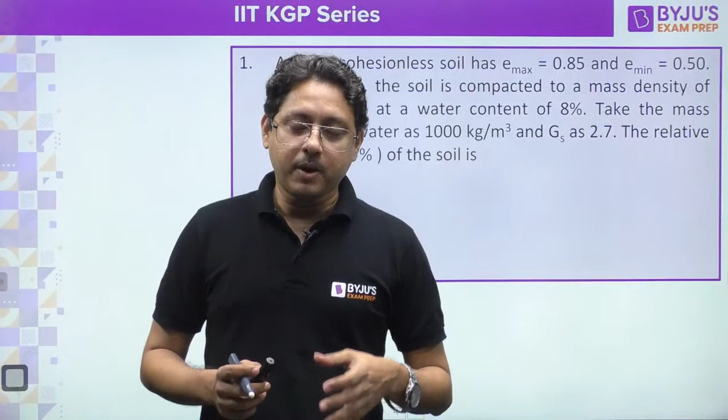So here is the first question for all of you. Before starting the question, I would like to discuss what kind of soil mechanics questions they have asked. As I told you, for strength of materials, one cannot predict exactly, but if you go through the previously asked questions, deflection was the most favorite chapter for IIT Kharagpur. Now here it is not like that. Almost from each and every chapter they have asked.

If you go through each chapter of soil mechanics, they have asked from each and every chapter. They have never skipped any chapter. So complete soil mechanics is important for IIT Kharagpur. So here is the first question.

A given cohesionless soil has Emax and Emin given. In the field, the soil is compacted to a mass density of 1800 kg per meter cube at a water content of 8%. Take the mass density of water as 1000 kg per meter cube, and Gs is also given. He is asking the relative density. You know the formula for relative density, that is nothing but Emax minus E divided by Emax minus Emin. Emax and Emin have been given, only the void ratio we are supposed to calculate.

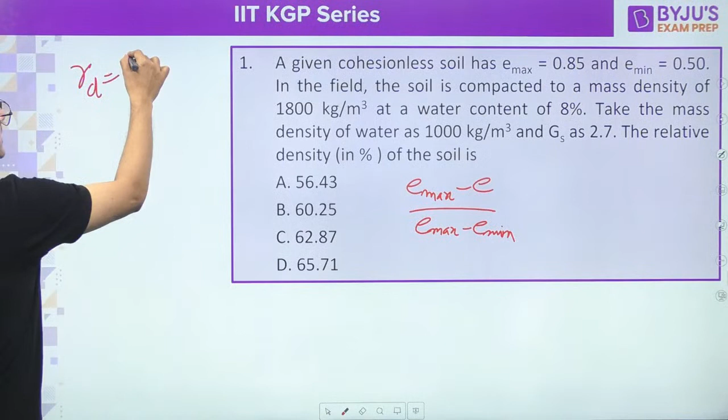For the void ratio, they have given the mass density at a water content of 8%. From that mass density you can calculate the dry density: 1800 divided by 1 plus the water content, which is 0.08. If you calculate, you will get around 1666.67 kg per meter cube. That is the dry density. Once you get the dry density, you know how to calculate the void ratio.

The void ratio can be calculated using the formula gamma D equals G plus eS by 1 plus e, and when S becomes 0, simply G by 1 plus e into gamma W. So 1666.67 equals G, given as 2.7, divided by 1 plus e, into 1000 kg per meter cube for water. If you calculate from here, the void ratio you get is around 0.62.

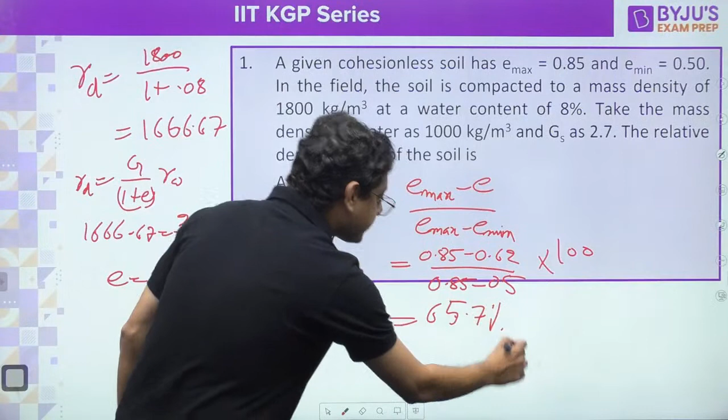These are just normal questions from the first chapter, and the first chapter is basically useful wherever you go, in any of the examinations. This first chapter of soil mechanics is quite handy and useful, right?

Forward to the next question, that is, a certain soil has the following properties given. He is asking the degree of saturation of the soil. How will you calculate the degree of saturation? It is quite simple, isn't it? Se = wG. But for this, e is not known to us. So you can calculate e from the porosity they have given. Porosity is 40%, that is 0.4, so e = 0.4 / (1 - 0.4), which is 0.4 / 0.6. You can keep it as it is if you want to do the calculation further.

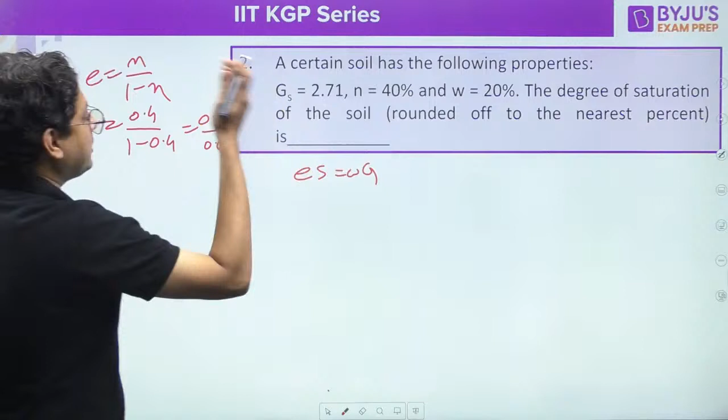So he's asking about the degree of saturation. S will be nothing but the water content given, that is 0.2, 20% water content, and the G value they have also given, which is 2.71, isn't it? 0.2 into 2.71 divided by 0.4 by 0.6. If you calculate, please let me know how much you are getting. What is the value you are going to get? The value you are going to get is almost around 81.3%.

81.3%. As they have asked, rounded off to the nearest percentage, means they are not willing to take any decimal, right? So rounded off will be 81%, isn't it? Rounded off will be 81%. Did you get that?

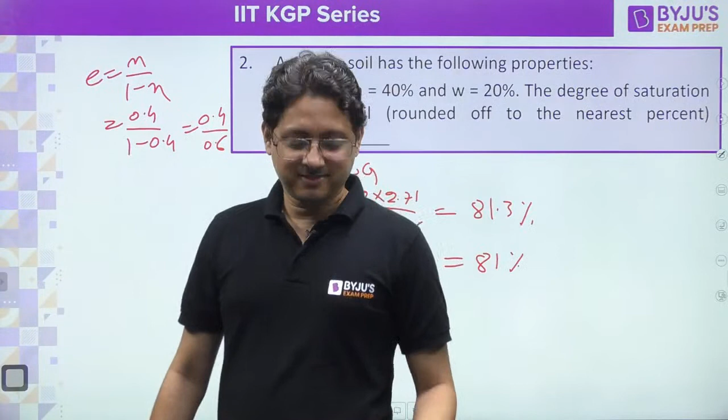Okay, go to the next question. Yes, Rahul, you did the calculation. I can tell you, you are getting 80.89. You know why? I'll tell you. 0.4 by 0.6, if you calculate it here and write down the value like 0.667 or something like that, then you are going to get 80.89. If you keep it as it is, the way I kept it, you'll get 81.3.

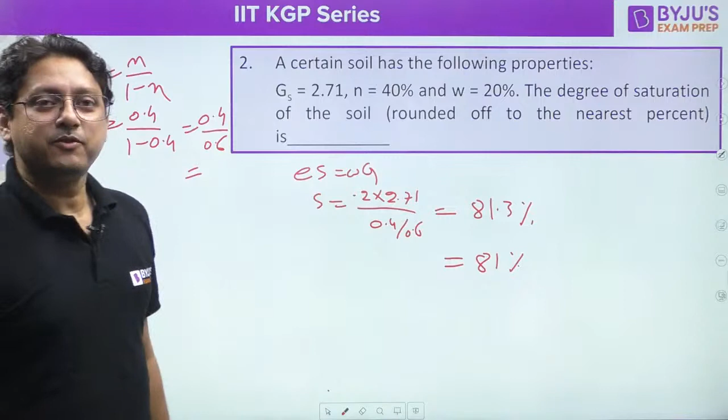The next question is, a soil sample has a void ratio of 0.5 and its porosity will be close to. That is too easy, isn't it? Just now we have solved it. The void ratio is given, and he's asking about the porosity, that is e / (1 + e). That's all. 0.5 by 1.5 will become simply 33.33, and that's 33%.

Next one. A borrow pit soil has a dry density of 17 kilonewton per meter cube. How many cubic meters of this soil will be required to construct an embankment of 100 meter cube volume with a dry density of 16 kilonewton per meter cube? So based on the dry density, he's asking what volume you need to take out from the borrow pit, isn't it? That is, 100 meter cube of embankment volume you need to fill.

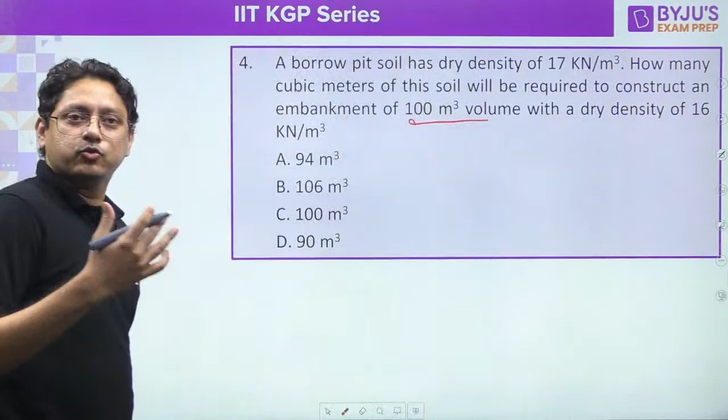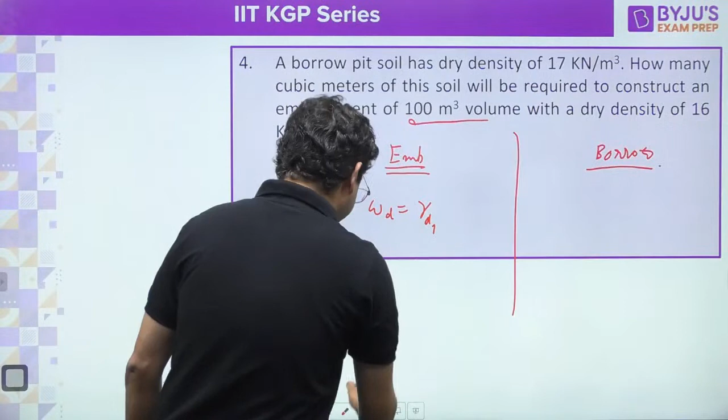So you must know one thing, that the dry weight of the soil will remain the same, right? If the dry weight remains the same, you can write it down for the embankment and for the soil you are going to take from the borrow pit. For the embankment, the dry weight of the soil is nothing but unit weight into volume. So that is the dry unit weight gamma d1 and volume V1, and here also the weight of the dry soil will be gamma d2 and volume V2, right?

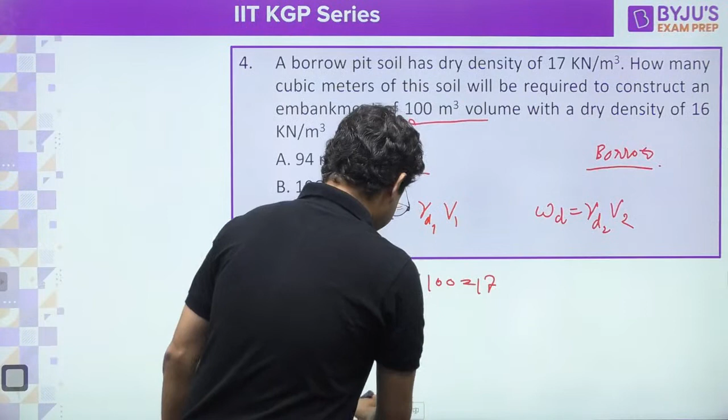For the embankment, both gamma d and volume have been given. The gamma d for the embankment is given as 16. So if you equate both weights, you'll get 16 into the volume 100 must be equal to gamma d2 for the borrow pit, given as 17, into V2. This volume we don't know. That is what they're asking.

Hello Swamijit, after a long time, huh?

So volume 2, if you calculate from here, how much are you going to get? It's almost around 94 meter cube, I think. 94.12 you will get. That is around 94.12 meter cube.

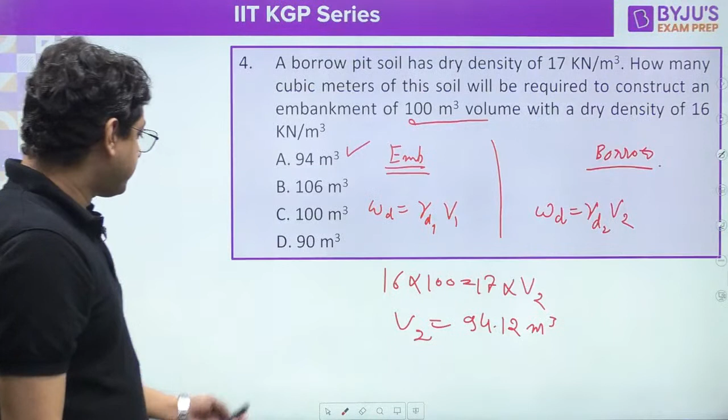Now, next one. As per the Indian Standard Soil Classification System, an expression for the A line. This is too easy. You know, they are not going to ask any other type, right? This is too easy. Almost everyone knows that.

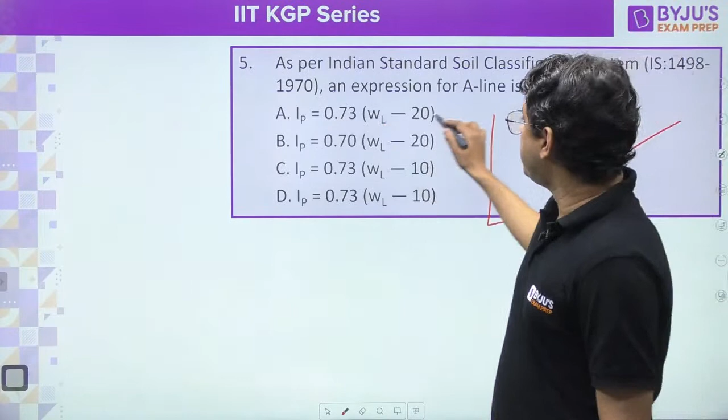A line, almost everyone knows that. 0.73 WL minus 20, that's all, isn't it?

Laboratory sieve analysis was carried out on a soil sample using a complete set of standard IS sieves. Out of 500 grams of soil used in the test, 200 grams was retained on IS 600 micron sieve, 250 grams was retained on IS 500 micron sieve, and the remaining 50 grams was retained on IS 425 micron sieve. We need to find the coefficient of uniformity.

What is the formula for coefficient of uniformity? I hope you know that. Coefficient of uniformity is D60 by D10 - the size of the sieve by which 60% of the soil is finer, and D10 is the size by which 10% is finer.

It's not U line, it's A line. Where is U line? I told you A line, I think. Santu, that was A line.

So here D60 by D10 you need to calculate. First of all, 500 grams of soil has been taken. The sieve sizes are 600 micron, 500 micron, and 425 micron.

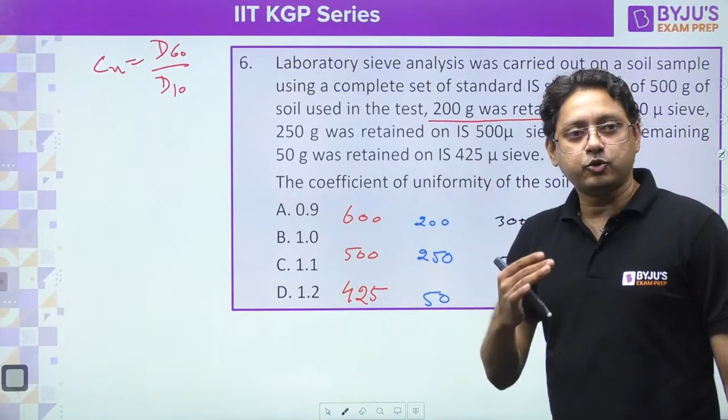So let's calculate the percentage passing from these sieve sizes. 300 is passing out of 500 grams of soil. So percentage passing, or percentage finer than 600 micron size, equals 300 divided by 500.

300 by 500 multiplied by 100 - what percentage do you get? You'll get 60%. And for this one, 50 by 500 into 100, you'll get 10%.

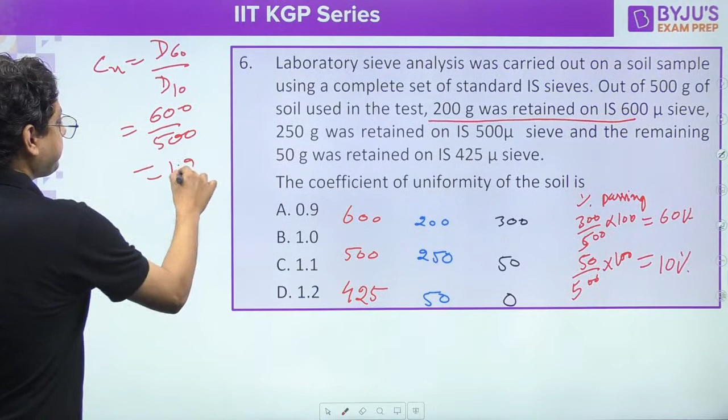Fortunately, for D60 and D10 we already have 60% and 10% directly - the size by which 60% is finer and the size by which 10% is finer. So D60 will be 600 and D10 will be 500. Coefficient of uniformity becomes simply 600 by 500, that is 1.2.

Next one: laboratory sieve analysis was carried out on a soil sample using a complete set of standard sieves. Same question here, but now he's asking about the classification of the soil.

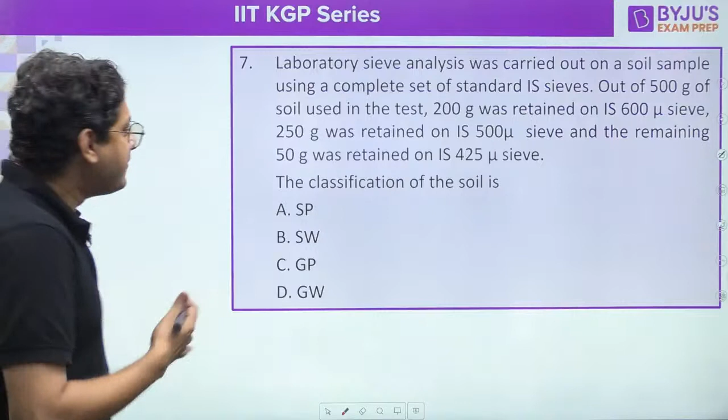Now let's see carefully, do we have any fine grains? From 75 micron, no soil is passing through the 75 micron sieve. All 500 grams of soil has been retained above 425 micron. Not even a single particle is passing from that 425 micron as per the question. So we don't have any fines.

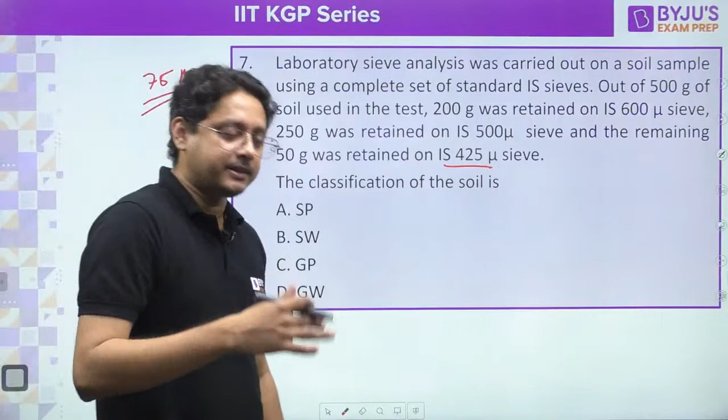Now for classification - we have to determine whether it's gravel or sand, and also whether it's well graded or poorly graded. But first it's sure that it's either gravel or sand, so we'll decide that first.

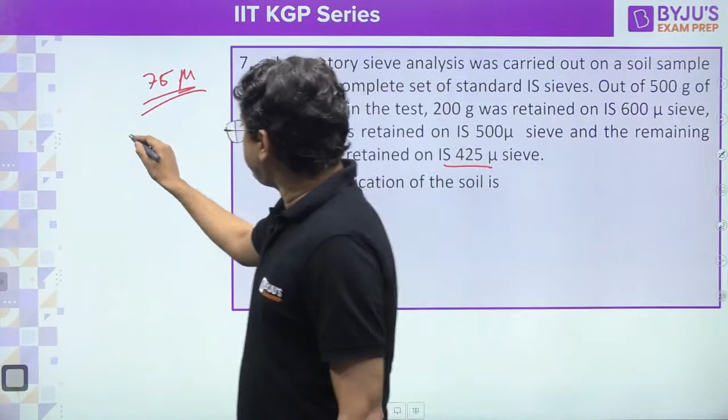If you see carefully, all the soil gets retained between 600 micron to 425 micron. And sand ranges from 4.75 mm to 75 micron. It means it has a huge range, and all the soil is actually falling in the sand category.

All the soil is falling in the sand position, so of course it is a sand. Although if it is more than 50%, we are going to give the name for the sand only. But it is all the soil coming to the sand category only, no gravel we have. So because all the soil we have is in between 4.75 and 75 micron, or 75 micron, if you write in terms of mm, it will be 0.075 mm, right? So it is a sand.

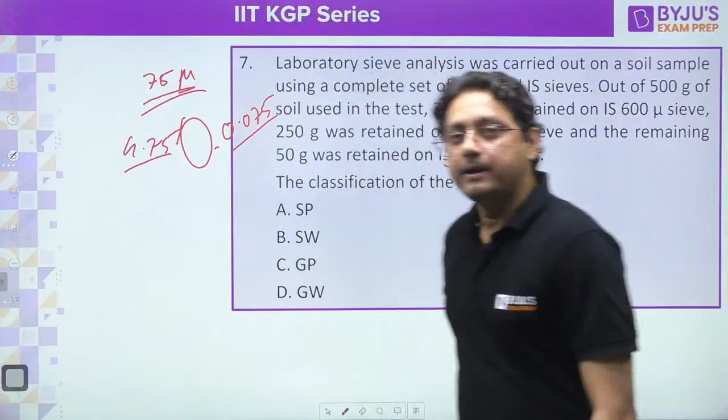Now we have to decide whether it's a well graded or a poorly graded kind of thing. If you'll see the coefficient of uniformity we already calculated, and as long as the coefficient of uniformity for the sand is less than 6, it is your poorly graded sand. Of course it is less than 6, that is 1.2 only, isn't it?

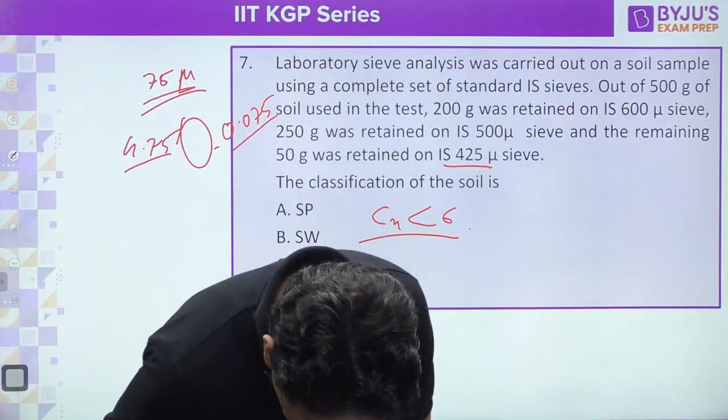Yes, Monica, absolutely correct. Babu, you are also correct. Yes, 1, 2, 3, CU ranges for well graded. So now you can say, what is that? It is a sand, although and poorly graded sand, that's all, SP. So that is the kind of categorization here.

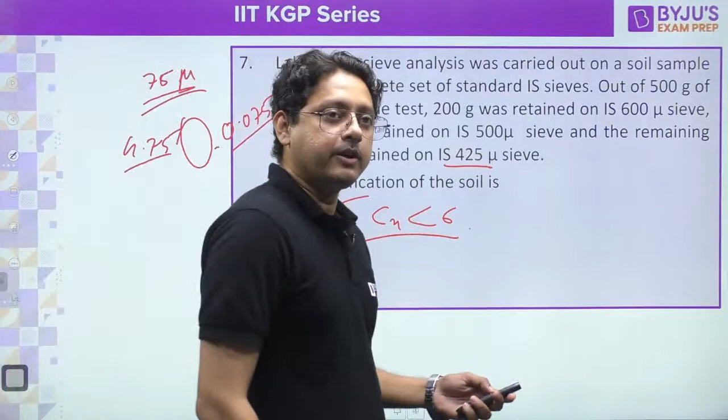Next one: Which of the following statement is not true in the context of capillary pressure in the soil? This is one kind of question. Actually the modified questions I usually prefer. Those who are following me know that some question related to when the water will be under tension, right, that question I usually bring. This time also it is appearing but in a different format.

So here, which of the following statement is not true in the context of capillary pressure? Water is under tension in the capillary zone. See, it is not about tension and compression, it is generally okay. Water is generally under tension in the capillary zone. Whenever you have a capillary zone, water will be hanging and it will be under tension, isn't it? That is actually the correct one.

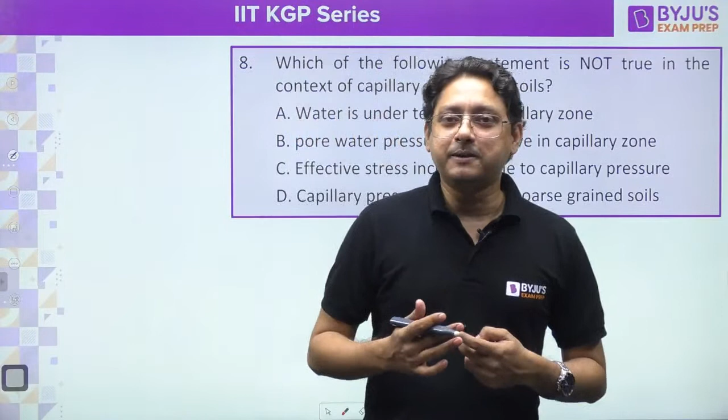Then, pore water pressure is negative in the capillary zone. Yeah, I was talking about this one. Pore water pressure is negative in a capillary zone. You understand one thing, that negative and positive is quite a different strategy. See, this is a general question.

In strength of material, generally we recognize that when we are applying the force, tensile force we consider as a positive one, and the compressive one we consider as a negative one. But for the soil and water, have you ever seen that someone is hanging with the help of water, isn't it? You can hang with the help of the rope, you cannot hang with the help of the water, isn't it?

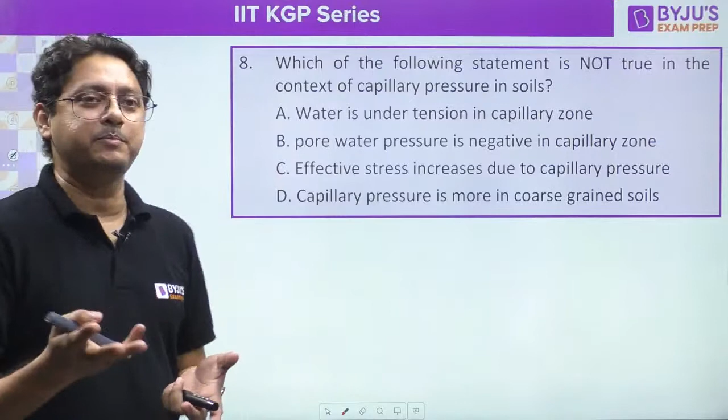So generally all the compressive force has been considered as positive and the tensile force has been considered as negative. So whenever they are talking about pore water pressure being negative, negative means it is in tension, then it will be negative, that's all. So both the sentences are actually the same. Pore water pressure is negative in the capillary zone, or water is under tension in the capillary zone — both statements are the same only. Where is the difference?

Both are correct only. Effective stress increases due to the capillary pressure. Yes, if you have a capillary zone, effective stress increases. Why? Because effective stress we write down as total stress minus pore water pressure. Once your pore water pressure becomes negative in the capillary zone, minus and minus will become plus, and your effective stress certainly will get increased.

This is also true. Only the last one, that the capillary pressure is more in the coarse grained soil, is the wrong one. Why? Because for the coarse grained soil, you will be having larger diameter pores. Larger diameter means the retentivity is less, the rise of capillary water will be very less in the coarse grained soil, so less pressure will be there. That's all, in a coarse grained soil the capillary pressure will be less. So this is the one which is not correct. So as per the answer, yes, this will be the correct one — meaning the wrong one is what he is asking about. Did you get that?

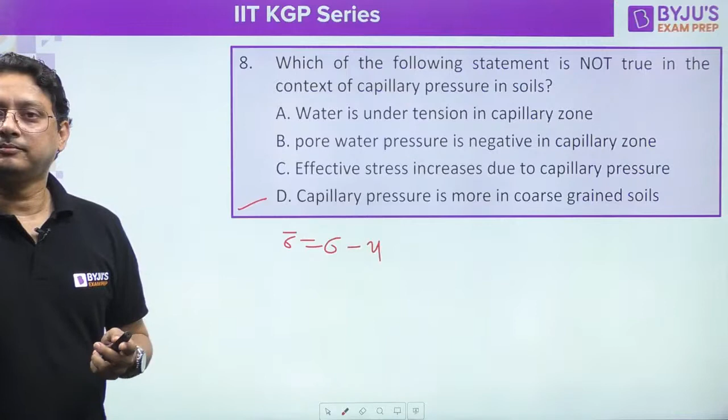The range of void ratio between which quicksand condition occurs in the cohesionless granular soil deposit. You already know that the quicksand condition, when it occurs, is based on the hydraulic gradient. What is that hydraulic gradient you have? Which is the critical hydraulic gradient, G minus 1 by 1 plus E, when it becomes 1.

And from here you can calculate it. It is quite easy question. You can just put the G value, they have not given it for granular soil deposit. So take the value of G, maybe around 2.67 or 2, generally it used to be 2.7, 2.6, something like that. So 2.67 minus 1 divided by 1 plus E equals to 1, and if you calculate from here, E value you will get is something around 0.67. So it ranges from 0.6 to 0.7.

Yes, Santu, absolutely correct.

To provide the safety against piping failure, once again same type of question.

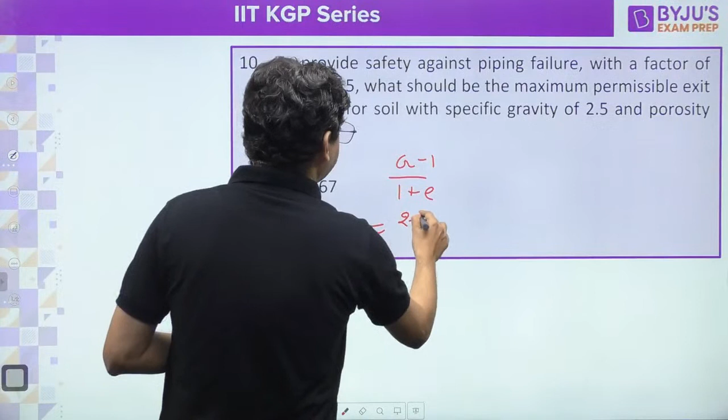So this is same type of question, isn't it? Same type of question. Why? Because he's asking about what must be the permissible exit gradient. So first of all, find out what is the critical gradient. So the gradient here is nothing but, if you calculate, G minus 1 divided by 1 plus E, and this time the G value is given as 2.5.

2.5 minus 1 divided by 1 plus void ratio. They have not given void ratio directly, but you can calculate it since they have given the porosity. From there you can calculate the void ratio, that is 0.35 divided by 1 minus 0.35. How much do you get? That is around 0.538. Put the value of 0.538 here.

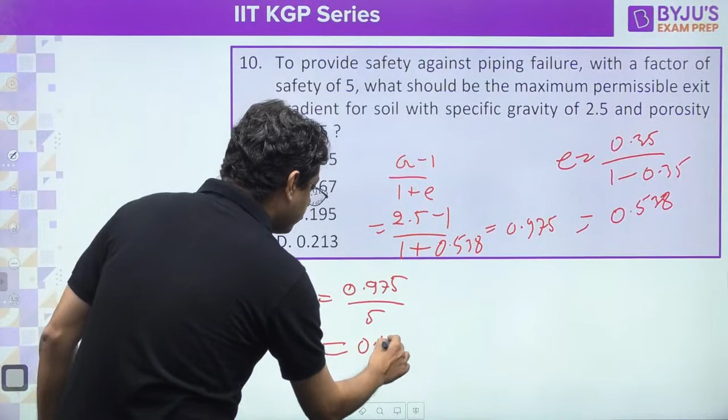And you get, from here, a value of about 0.975. This is the critical gradient you have. Now, if this is the critical gradient and he is saying that consider the factor of safety of 5, then by considering factor of safety of 5, you cannot allow the exit gradient to be more than the permissible one. So the permissible gradient will become 0.975 divided by the factor of safety, which is nothing but 0.195.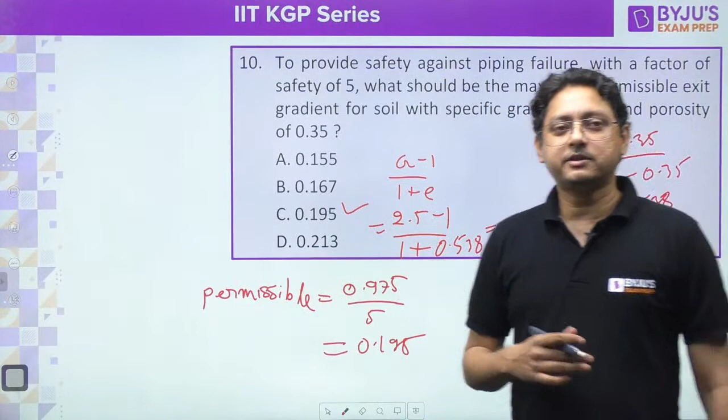But generally, if you see whatever question I am solving, what do you feel? All are very general questions asked from each and every category of the chapter, isn't it? When solving previous year questions, what exactly are you looking for? Not just the solution. Solving previous year questions is about going through what kind of questions they have asked in the past, when they conducted the GATE examination for 2000, then 2006, then 2014, and what type of questions they used to prefer to ask. That's what you are going through, and by seeing all that, you will observe generally very genuine questions have been asked.

You can imagine that if you are really preparing for soil mechanics, and if you are good in your basic concepts and fundamentals, then if you can remember some of the formulas, although it is very necessary to remember them, it will be quite effective to get marks at least from the soil mechanics portion. So you can effectively get marks from soil mechanics questions.

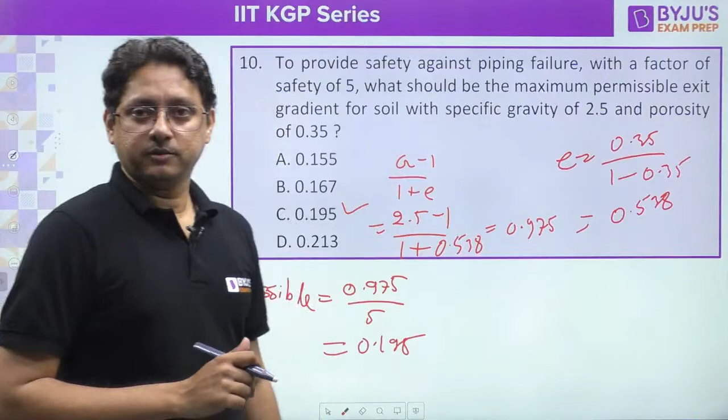This one, once again, is a typical type of problem. There is nothing new here; whenever they ask this type of problem, it is the same category. See this question, without even seeing it, once you see that a flow net has occurred, you will simply write it down. Whether he is asking for discharge or not, discharge is KH, the permeability, hydraulic head, and number of flow channels, then number of potential drops. That's all you are going to write down. What else? Now calculate, simply you calculate.

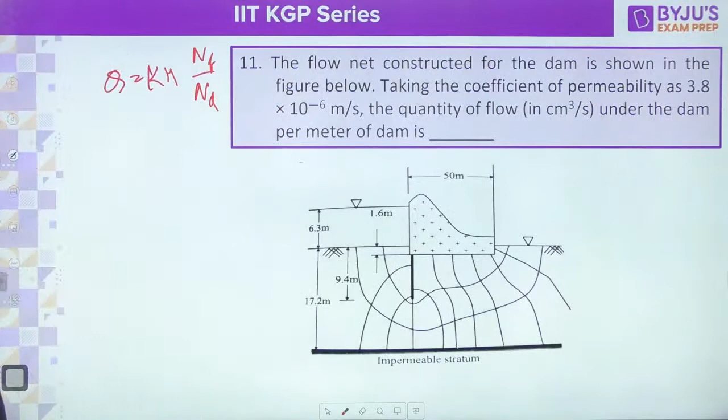He's asking, now you read out the flow net constructed for the dam shown in the figure below, taking the coefficient of permeability. They have given it. The quantity of the flow, of course, he's asking about the discharge now, quantity of flow under the dam per meter. And he's asking in centimeter cube per second. Okay, let it be centimeter cube per second.

So calculate number of flow channels and number of potential drops here. What is the potential drop? These are all potential lines. 1, 2, 3, 4, 5, 6, 7, 8, 9, 10, 11. So potential drop from one to another. How many did I calculate? 1, 2, 3, 4, 5, 6, 7, 8, 9, 10, 11. So you have 11 lines.

So total potential drop, if you are talking about, there is one drop, second drop, third, fourth, fifth, sixth, seventh, 8, 9, and total potential drops during the flow are 10. And number of flow channels, if you see, there are only 3 channels, isn't it? 1, 2, and 3. Only 3 flow channels. So just keep the values here and calculate. So it is given as 3.8 into 10 raised to

3.8 into 10 raised to minus 6 multiplied by what is head? What is the hydraulic head? Right, head, if you see, this is 6.3. Can you see that? 6.3. Then number of flow channels you have 3, and number of potential drops you have 10.

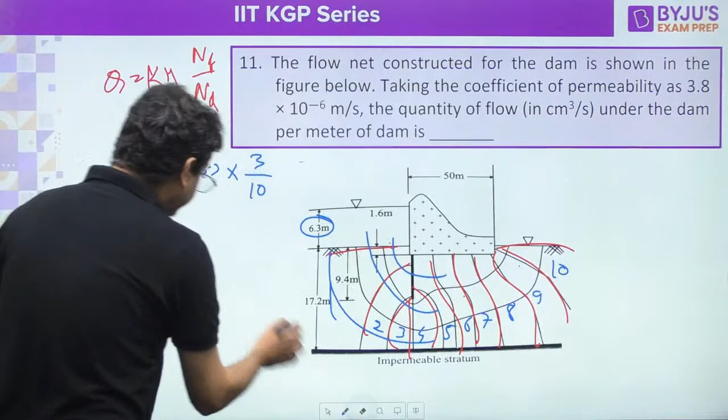One more thing you should understand, this is in meter per second, and that 6.3 is in meter, right? So the Q value, the discharge value, you are going to get in meter cube per second. So calculate what you will get. Meter cube per second per meter you will get, that is 7.182 into 10 raised to minus 6 meter cube per second.

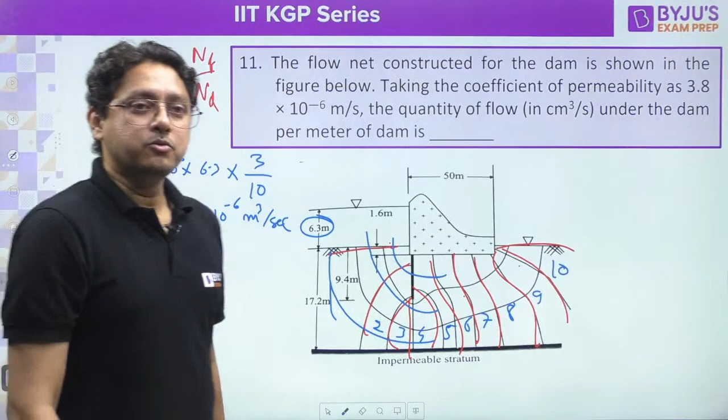He's asking in centimeter cube per second. So let us calculate in centimeter cube per second. 1 meter is equal to 10 raised to 2 centimeter. So it will become 10 to the power plus 6 if I want to convert it into centimeter cube. Minus 6 plus 6 will go off, and finally you are going to get 7.182 centimeter cube per second. That's all. See, these types of questions are quite easy.

Next one, water is flowing at a steady rate through a homogeneous and saturated horizontal soil strip of 10 meter length. The strip is being subjected to a constant water head of 5 meter at the beginning and 1 meter at the end. If the governing differential equation of the flow in the soil strip is d square h by dx square, where x is the distance, find the value of h in meter at the middle of the soil strip.

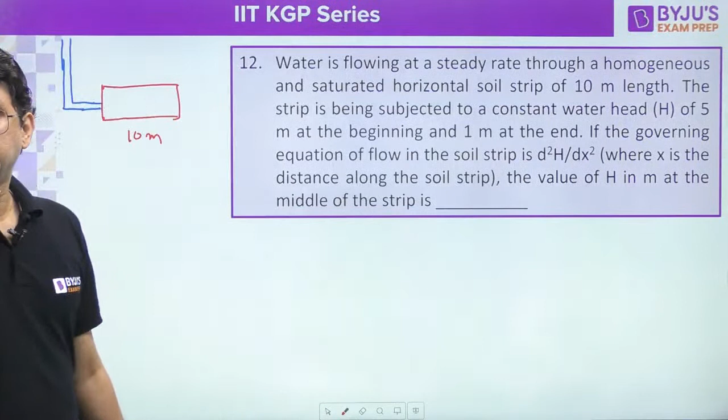So water is flowing at a steady rate. Steady flow is there through a homogeneous and saturated horizontal soil strip of 10 meter length. So lengthwise it is flowing. Okay. So this is maybe 10 meter of the soil, and the strip is being subjected to a constant water head of 5 meter at the beginning. I am considering that the flow is happening from left to right side, then

Yes, Santu, that is in per meter only. Previous question you are asking about, right? They have asked centimeter cube per second per meter. That is per meter width only, right?

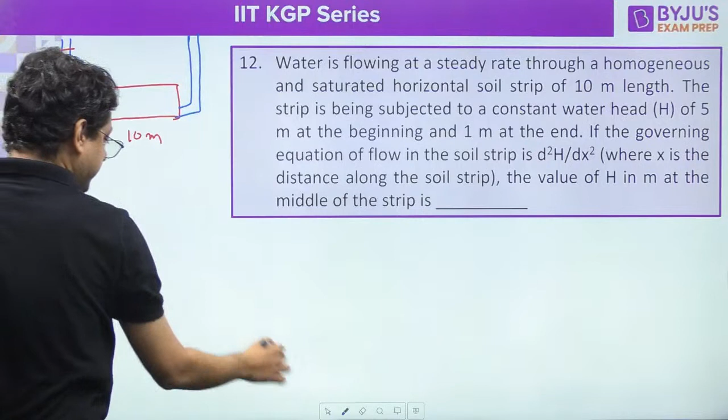So here suppose it is 5 meter, and at the end how much? 1 meter at the end. So this is 5 meter, and at the end it has 1 meter, right? You have an equation for the hydraulic head, that is d square h by dx square with respect to distance equals 0. This equation you can simply utilize to find out the head at the mid of the section, because from the initial to the end how the hydraulic head is changing, that we don't know.

So simply integrate and solve it. This is quite a simple question. Integrate, how much will you get? That is dh by dx equals some constant c1. Some c1 constant you will get, isn't it?

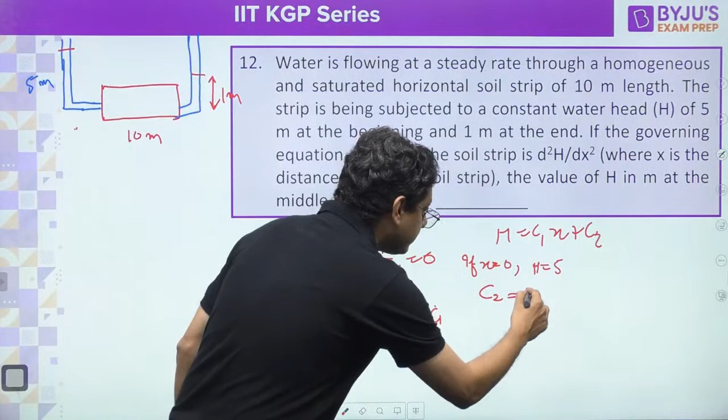Then another one, when x equals 10 meter, then your head is how much? 1 meter, right? Then your head is 1 meter. Put the value here. For x equals 10, put that 10 here, then h is 1. So 1 equals c1 into 10, plus c2, which we already calculated as 5. And c1 you will get how much? 1 minus 5, that will be minus 4, minus 4 by 10, you will get minus 0.4. So c1 you are getting minus 0.4.

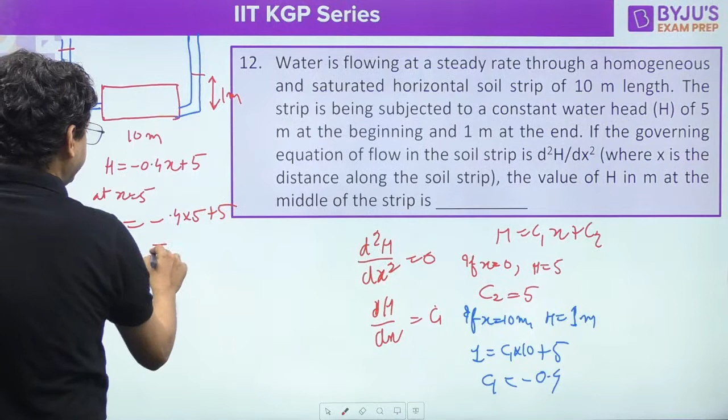Let me write down here, your equation will become h equals minus 0.4x plus 5. Now find at x equals 5 meter. At x equals 5 meter, what will be your h value, hydraulic head? Put that 5: minus 0.4 into 5 plus 5, and you will get plus 3. That's all. So 3 meter is the head.

Next one, the average effective overburden pressure on a 10 meter thick homogeneous saturated clay layer is given. Consolidation test on an undisturbed soil sample taken from the clay layer showed that the void ratio decreased from 0.6 to 0.5 by increasing the stress intensity from 100 kPa to 300 kPa. Okay. So the average effective overburden pressure is 150 kPa, which is given. And actually at 150 kPa we don't know what is the void ratio. That is what he is trying to find out.

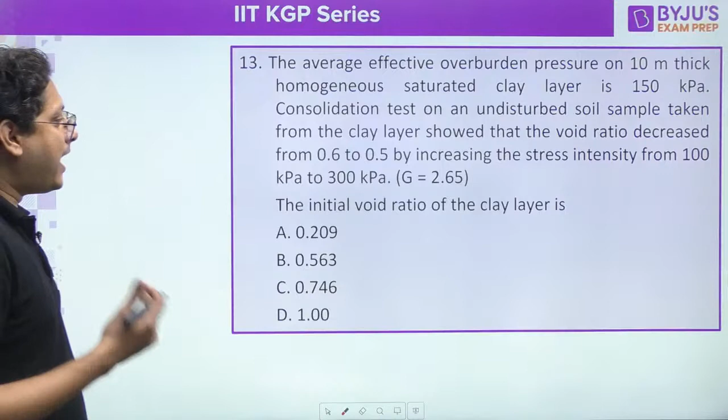But from the laboratory test we have an idea that when the void ratio is reducing from 0.6 to 0.5, the stress intensity was increased from 100 to 300 kPa. You know that for over consolidated soil you'll get a curve, but for a normally consolidated soil you have a straight line, right? So the Cc, the compression index, does not get changed for the normally consolidated soil. Agree or not? So first of all, from the given values 0.6 to 0.5, we will calculate the value of Cc, the compression index.

So Cc will be how much? Delta e is the change in the void ratio, that is 0.1, divided by log of sigma 2 by sigma 1. Sigma 2 is 300 and sigma 1 is 100. From here, if you calculate the compression index Cc, what is the value of Cc you are getting? 0.21.

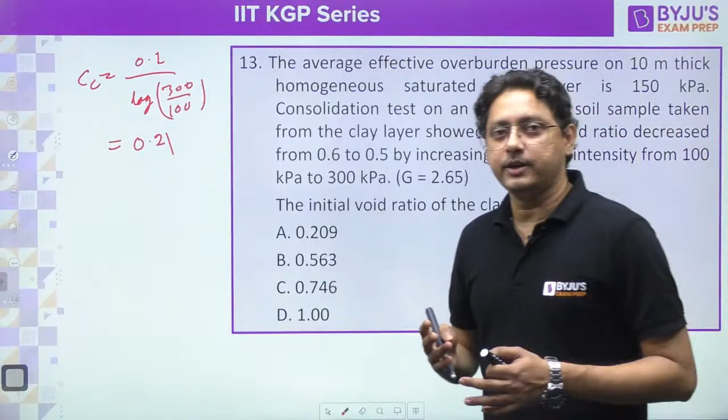Now, as I told you, this is what they observed from the laboratory test. So the Cc value is not going to change for the normally consolidated soil. And at 150 now, it is our duty to find out what will be the void ratio. If you increase from 100 to 150, what will be the void ratio? Once again you apply the same formula: Cc, which is 0.21, equals the change in void ratio from 0.6 to another level, which we don't know and will calculate, divided by log of 150 by 100.

Now from here, if you calculate, you will get the void ratio at the effective overburden pressure of 150 kPa, right? So simply they have utilized the concept of the compression index Cc, right? And how much e value, that void ratio value, are you getting from here? 0.563.

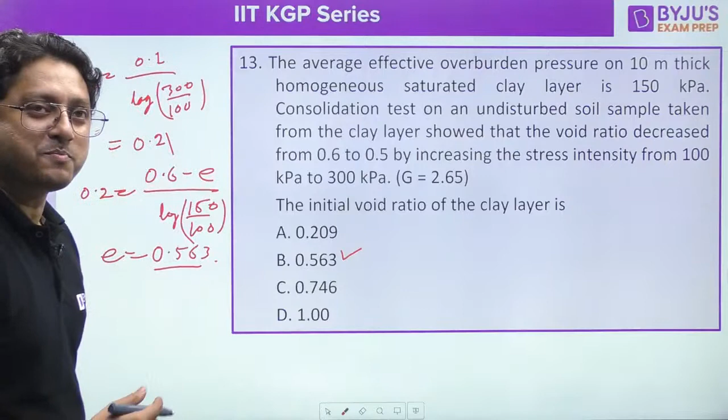0.563. What have they asked? The initial void ratio of the clay layer. That is what they have asked, isn't it? That is done. Now the next one is very important and very fantastic, isn't it?

Because see that settlement equation, the total consolidation settlement of the clay layer, the same question. Due to the construction of a structure imposing an additional stress intensity of 200 kPa. So if you are going to impose that additional stress intensity of 200 kPa, he is asking what is the settlement. Now you know what the formula for the settlement is.

What is the formula for settlement? Settlement formula, can you tell me? Cc H naught by 1 plus e naught log of, is it looking very weird? Oh. Cc by 1 plus e naught log of sigma 2 by sigma 1. Sigma 2 by sigma 1, isn't it?

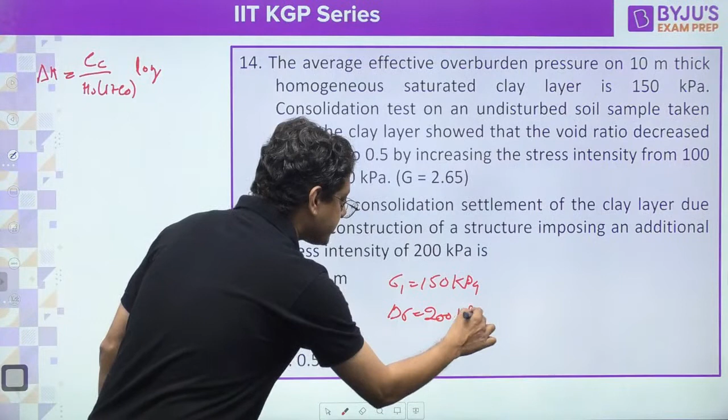That sigma 2 is now what? Sigma 1 plus del sigma. And sigma 1 is what now? 150 kPa, right? 150 kPa, and del sigma, he is saying that 200 kPa of stress he is going to increase. 200 kPa, write it down there. Log of 150 plus 200 divided by 150.

Now calculate it. Cc value already we have, which is 0.21. H naught, the initial thickness of 10 meters, is already given. Let me write down all the values also. 0.21, just now we have calculated, right? Oh, I am sorry, this H naught I have written at the bottom. I'm really sorry for that one.

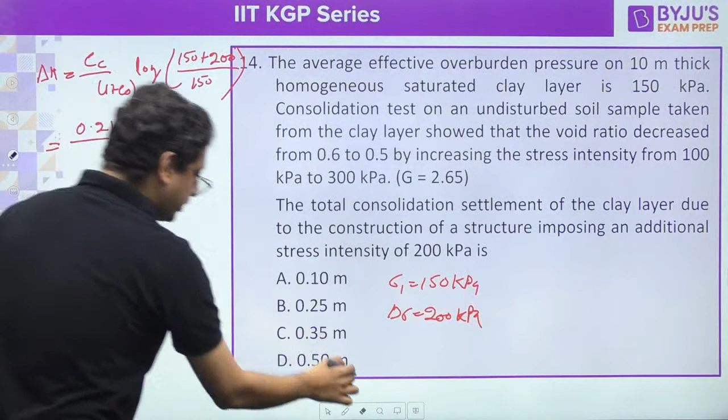Okay. Yeah, I got it. Yes, Santu, I got it. H I have written downside. So into H naught is 10, divided by 1 plus e naught. e naught also you have calculated, 0.563, in the previous slide if you see. So this is 10, this is 1.563. Then log of all this, please do the calculation.

What is the settlement you are going to get?

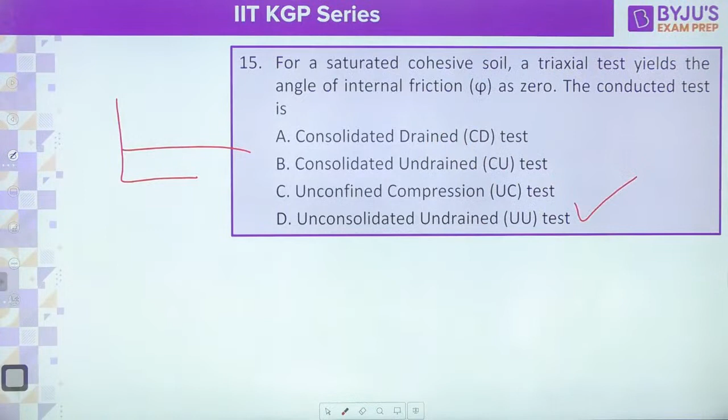For a saturated cohesive soil, a triaxial test. This is once again a very simple question. Whenever it is a saturated cohesive soil, there is only one condition when you will get phi 0, meaning no phi value: the unconsolidated undrained test. Quite a simple one. Next one, you see a sample of saturated cohesionless soil tested in a drained triaxial compression test.

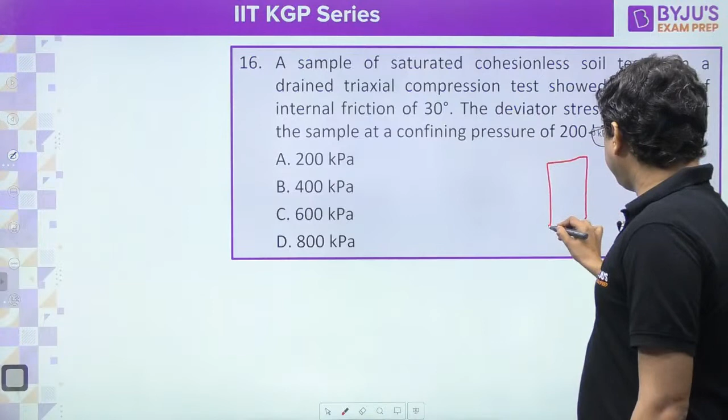For the shear strength chapter, a few concepts, and along with that only two equations, right? Whenever you are studying the failure of the soil in a triaxial testing machine, over the failure plane there is one formula: tau equals c plus sigma tan phi. Other than that, using sigma 1 and sigma 3, you have another formula: sigma 1 equals sigma 3 tan square alpha plus 2c tan alpha. These are the only two equations generally helpful for solving any problem from the shear strength chapter, right?

He's saying that a sample of saturated cohesionless soil tested in a drained triaxial compression test shows an angle of internal friction of 30 degrees. Phi they have given, 30 degrees. He is asking the deviatoric stress at failure of the sample at a confining pressure of 200 kPa. Sigma 3 they have given, 200 kPa. So one can calculate the sigma 1 value, isn't it?

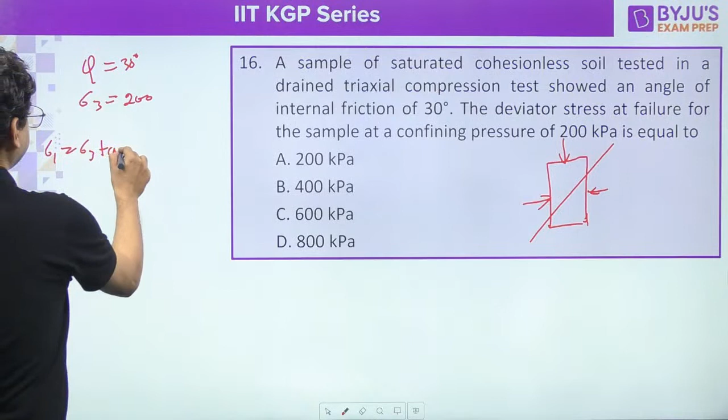One can simply calculate the sigma 1 value. What do you say? So how can one calculate the sigma 1 value? Sigma 1 equals sigma 3 tan square alpha plus 2c tan alpha. That is the only equation we are going to use, where alpha equals 45 plus phi by 2, isn't it?

So alpha equals 45 plus phi by 2. So alpha you will get around 60 degrees: 30 by 2 is 15, plus 45, that is 60, tan square alpha. It is a sample of saturated cohesionless soil, so C is already 0. No cohesion. So C is already 0, isn't it?

Then sigma 1, if you calculate from here, how much will you get? That is sigma 3, 200, multiplied by tan square alpha. Tan 60 degrees is root 3, squared is 3. You are going to get 600 kPa. This is your sigma 1, but this is not the deviatoric stress, right? The deviatoric stress is the stress which you are applying over your confining one.

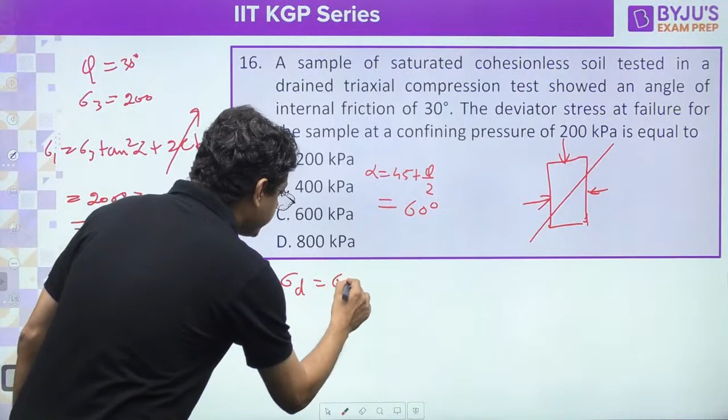So subtract the confining one. 600 minus the confining one, which is 200, you will get 400, right? So deviatoric stress will be 600 minus 200. If you subtract the confining one, you will get 400 kPa. That's all.

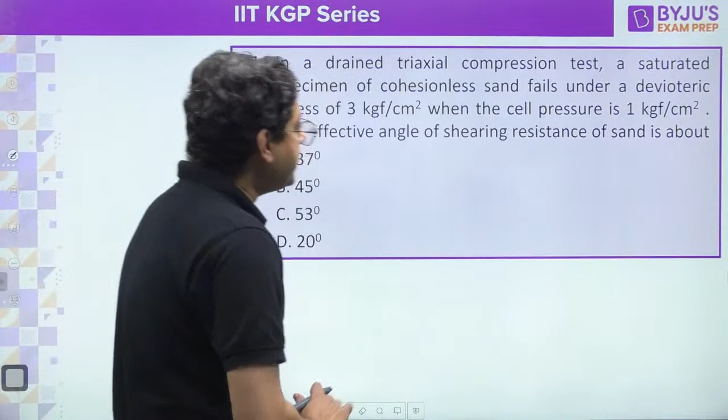Next one. In a drained triaxial compression test, a saturated specimen of cohesionless sand fails under a deviatoric stress of 3 kgf per centimeter square when the cell pressure is 1 kgf per centimeter square. The effective angle of shearing resistance of the sand? He is asking about the phi value. Now, once again, the same equation you are going to use, isn't it?

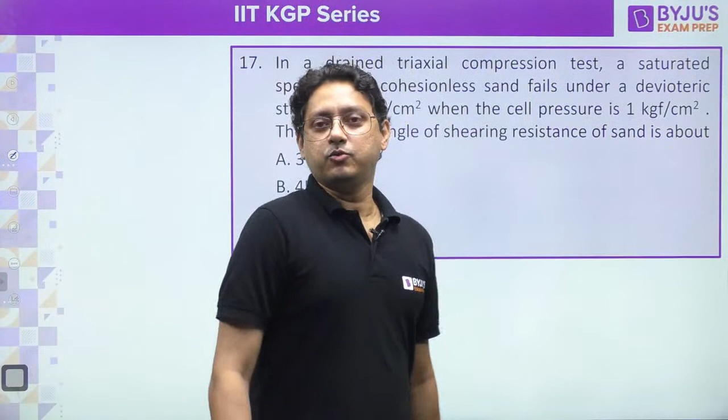What happened, Varun? Why are you saying sorry? So here, okay.

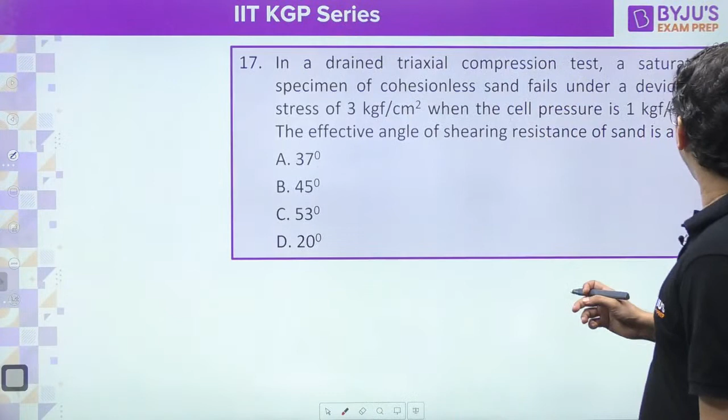Deviatoric is given, confining is given, so sigma 1 will be 3 plus 1, 4, and sigma 3 is 1. Now you know sigma 1 and sigma 3. It is a drained triaxial compression test on a saturated specimen of cohesionless sand. Cohesionless, C is 0. Once again I will use sigma 1 equals sigma 3 tan square alpha plus 2c tan alpha. C is 0, so no need to write the 2c tan alpha term.

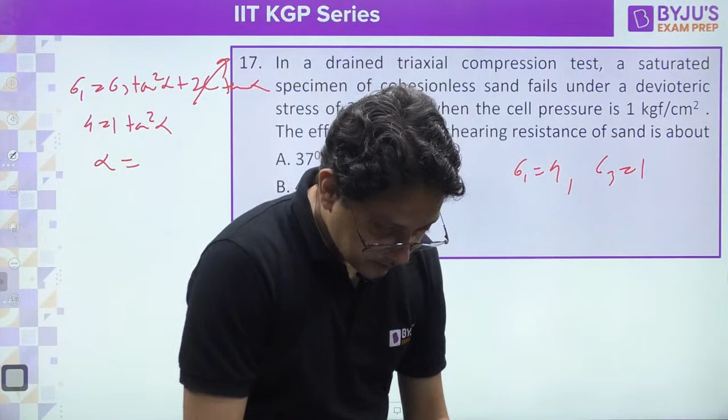Sigma 1 and sigma 3 you know, that is 4 and 1. Tan square alpha you can calculate. Tan square alpha equals 4, tan alpha equals 2. Alpha value, if you calculate from here, how much are you getting? I have calculated it. Where is that one? Okay. Alpha, you are getting 63.43. Now he's asking about phi.

Alpha equals 45 plus phi by 2. So phi is 63.43 minus 45, multiplied by 2. How much are you going to get? Almost 36.87, which is around 37 degrees.

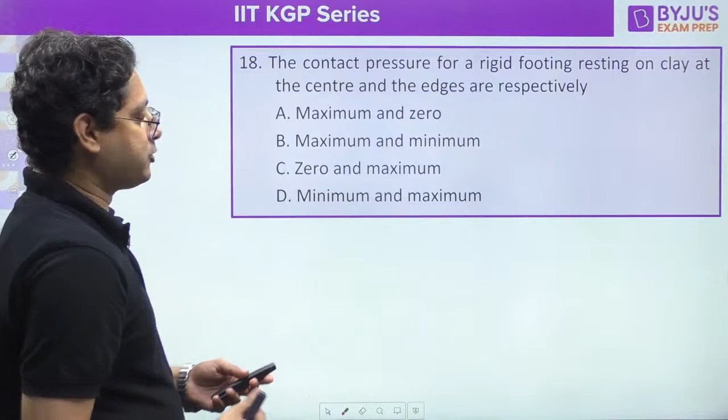The contact pressure question has been asked several times in different examinations. The contact pressure for a rigid footing resting on clay at the center and edge are respectively? For a rigid footing, remember one thing: the settlement will always be the same, whether at the edge or at the middle of the footing.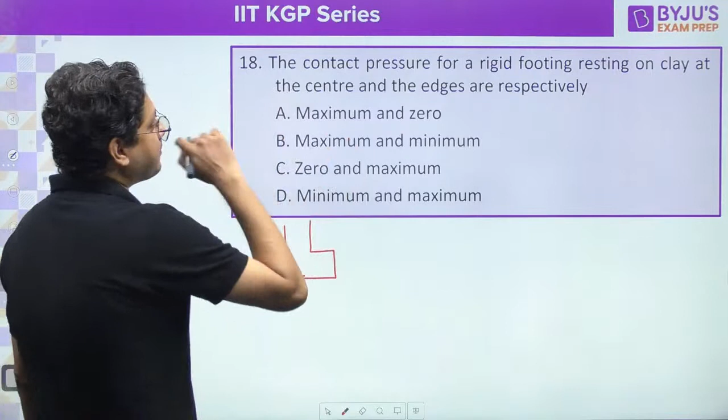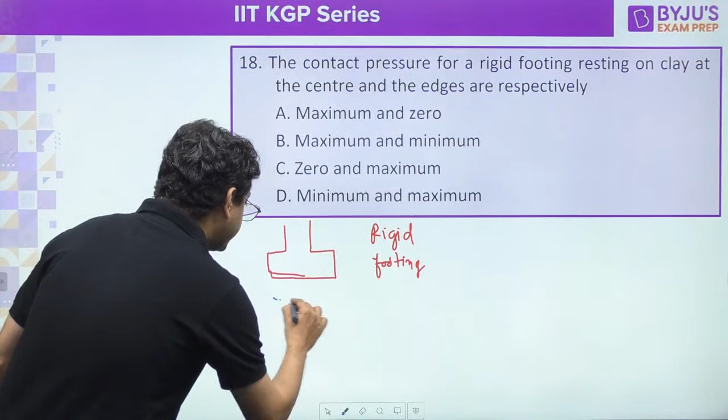So for the rigid footing he is asking about the contact pressure over the clay. This is your rigid footing. For the rigid footing, as I told you, settlement will be the same, only the contact pressure will be different. Over clay, the maximum contact pressure will be at the edge and the minimum contact pressure at the middle of the footing.

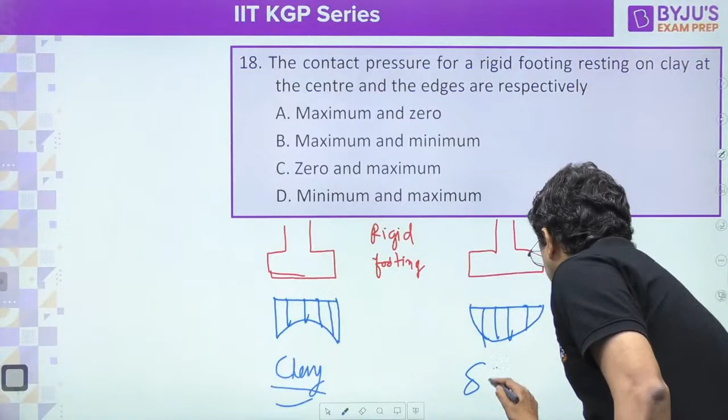Whereas for the same rigid footing, if it is resting on sand, the settlement will still be the same, but the pressure will be maximum at the center. This is when the rigid footing rests on sand.

So it will be minimum at the center and maximum at the edges. That is correct. Minimum at the center and maximum at the edges. Yes, Shubham Raj, absolutely correct.

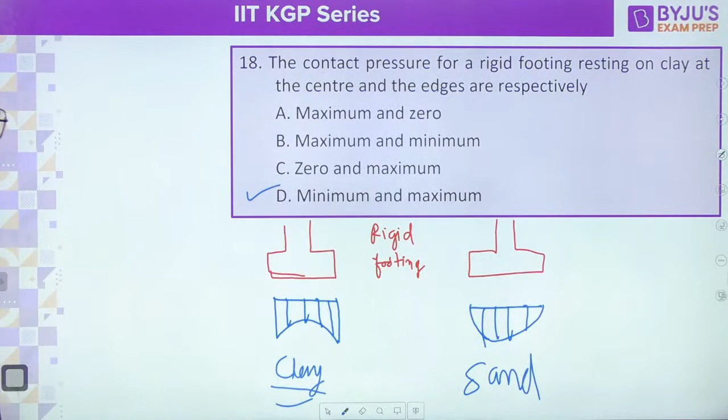Circular raft foundation of 20 meter diameter. This is a very nominal question. We are studying three types of settlement. This one I'm not going to solve; there is only one formula for it. Elastic settlement: when the load comes over the soil, there will be elastic settlement, and you already have the formula related to Poisson's ratio and Young's modulus.

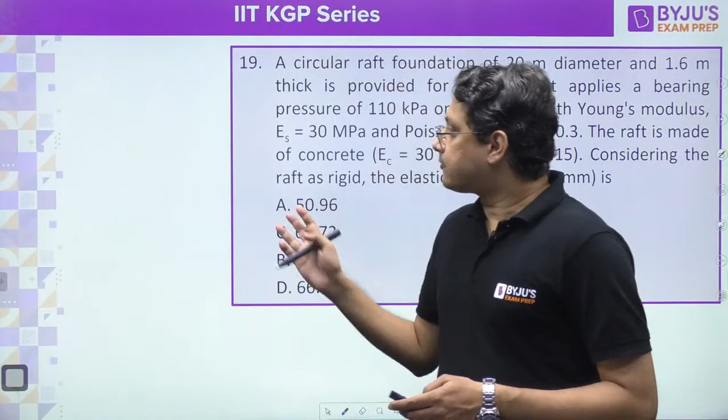Use that formula, 0.8 multiplied by q and so on. Then you have primary consolidation and secondary consolidation. This one please do yourself. The ultimate bearing capacity of soil is 300 kilonewton per meter square. The depth of foundation is 1 meter and unit weight of the soil is 20 kilonewton per meter cube. Choosing a factor of safety of 2.5, the net safe bearing capacity?

They have given the ultimate bearing capacity. So from ultimate bearing capacity, you can get the net ultimate bearing capacity, isn't it? 300 minus gamma d. Where is gamma? 20 kilonewton per cubic meter. And where is d? Depth of foundation is 1 meter, so 300 minus 20 you

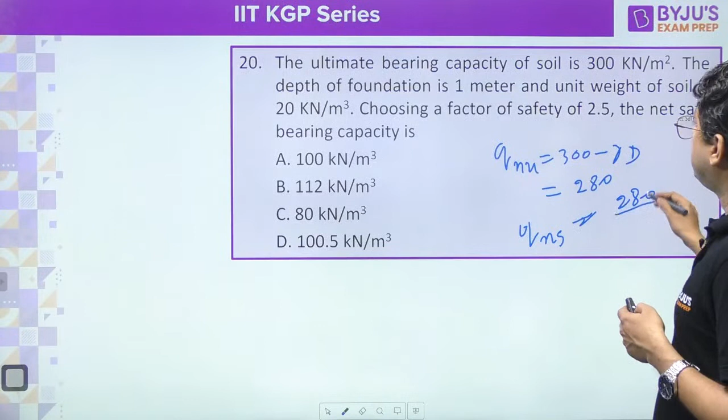will get 280. Then Q net safe is asking; Q net safe is simply Q_nu by factor of safety, that's all. So 280 divided by factor of safety 2.5, and you will just calculate the value. Kitna jayega? 280 by 2.5, how much you are getting? 112, that's all, 112.

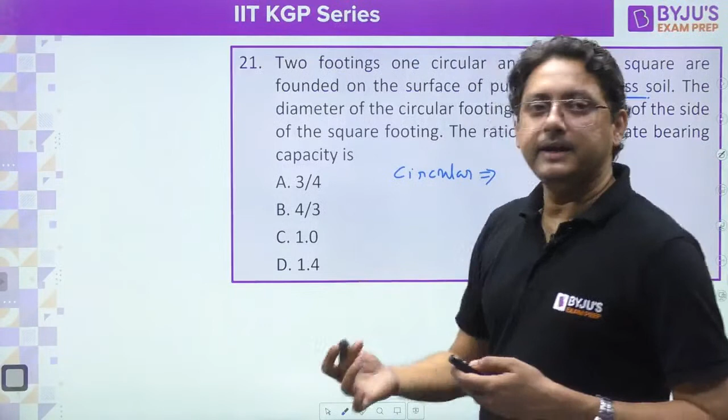Now first of all, if you write it down for the circular one, as they have asked, first circular, then square footing. Okay, for the circular one, what is the bearing capacity formula? So for circular Qu, I'll write down C here, just to identify the circular one. C Nc plus, there is no meaning of writing down C Nc. C value already is 0, no?

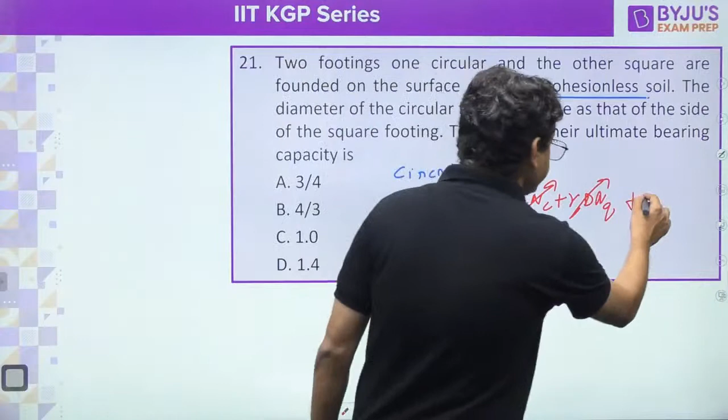Plus gamma D Nq. Then once again, D, that is the depth of the foundation. He is keeping the footing over the surface. On the surface, there is no depth of footing, so that is also not necessary. So C Nc plus gamma D Nq are not at all necessary. And one more thing, it is a circular one. Here you will get 0.3, that is 0.5 multiplied by 0.6, your shape factor.

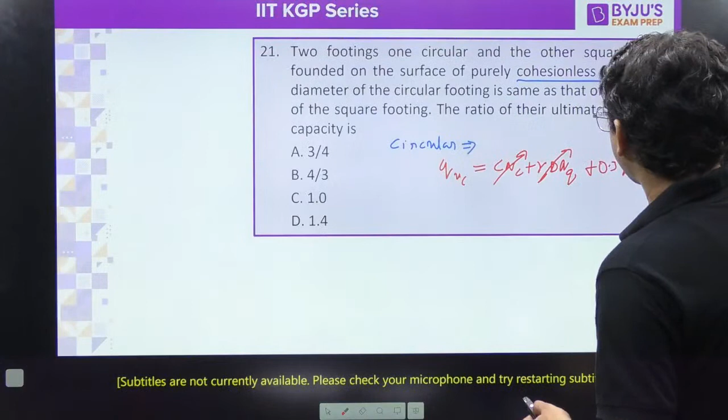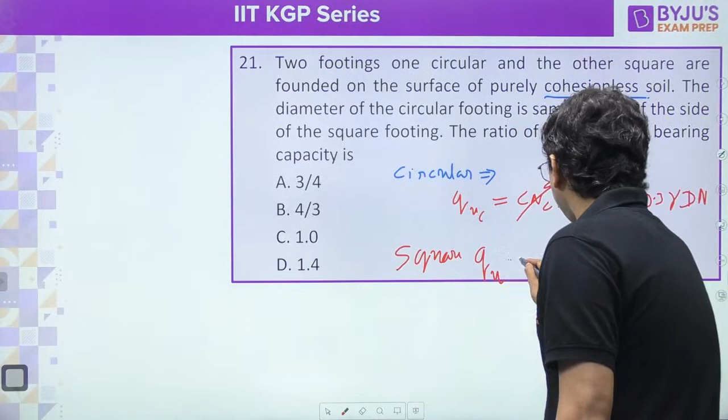Then gamma D N gamma, isn't it? Here it is a circular one, so dia will be there into N gamma. Keep it as it is. Okay. So for the square footing, how much you will get? The ultimate bearing capacity for the square footing, once again these two are not necessary, keeping over the surface, and the soil doesn't have cohesion, so C will be 0. So simply 0.4 gamma B N gamma, right? This is N gamma. Please consider that.

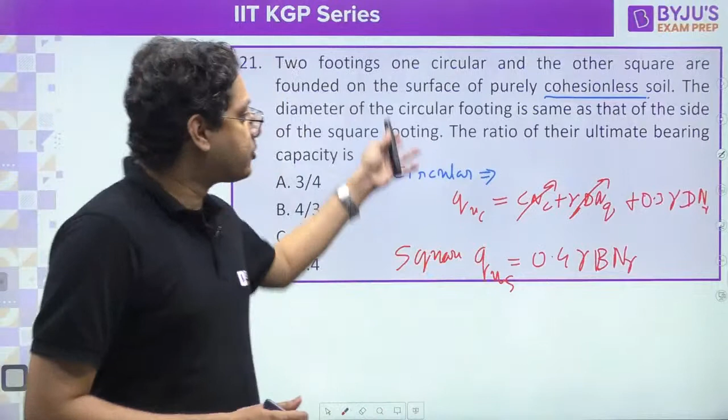Now see, ratio, if you take 0.3 gamma D N gamma by 0.4 gamma B N gamma, the dia of that footing and width of that footing, they are saying in the question it is same. The diameter of the circular footing is same as that of the side of the square footing. If both are same, what is the ratio you are going to get? That is 0.3 by 0.4, or simply 3 by 4. That's all.

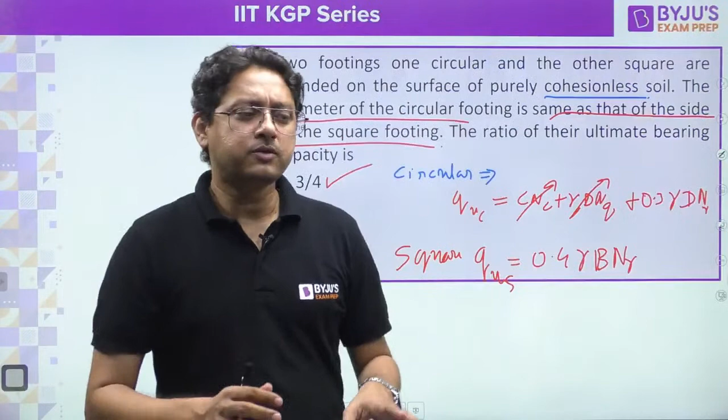So thank you all of you. These are just a few questions, and you have questions from the stability and lateral earth pressure chapter also, which you have to see, but only 1 or 2 questions will be there. So the conclusion from all these questions which I have solved today, if you go back and analyze it, they're asking from each and every chapter. Is there some favorite chapter? No, not at all. The questions are very equally distributed from all the chapters. That's all.